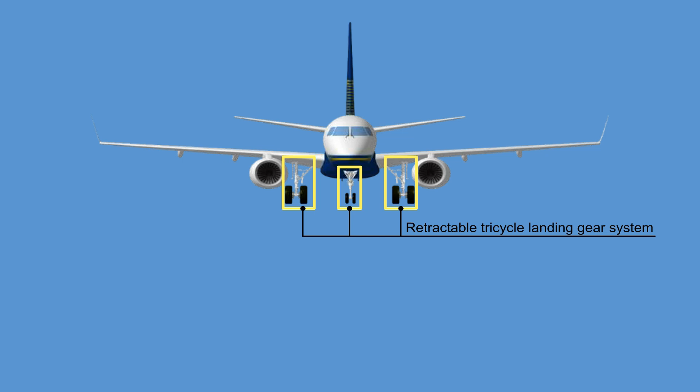The Embraer 190 has a retractable tricycle landing gear system with 2 main landing gear assemblies and 1 nose landing gear assembly. The main landing gear assemblies are telescopic and retract sideways into the wing and fuselage. Each main landing gear assembly incorporates 2 wheels with multi-disc carbon brake assemblies.

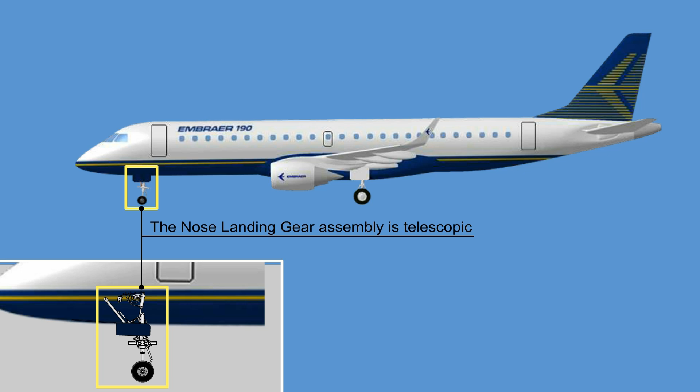The nose landing gear assembly is telescopic and retracts forward into the fuselage. The nose landing gear assembly incorporates 2 wheels with a hydraulic nose wheel steering mechanism, allowing the aircraft to turn on a taxiway as narrow as 17 meters.

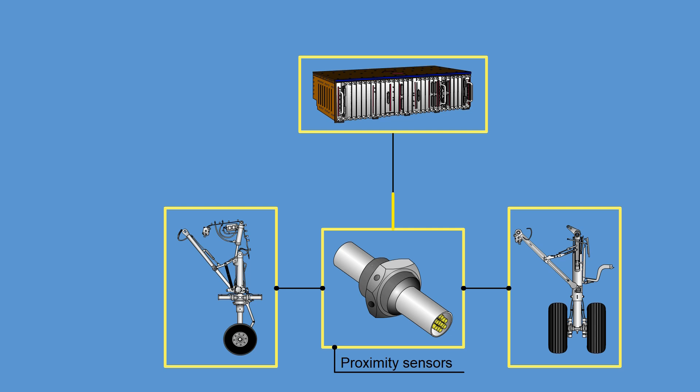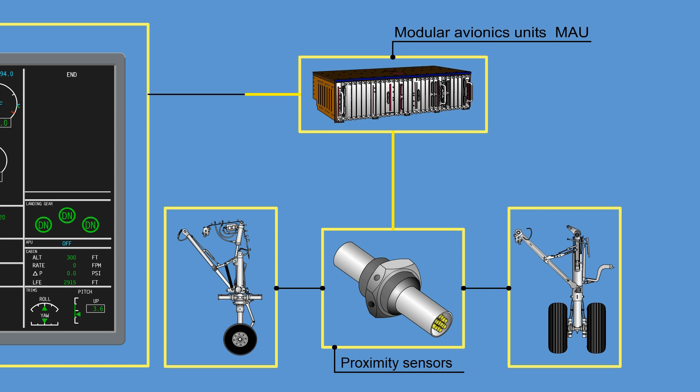During normal operation, the landing gear system is electronically controlled and hydraulically operated. Several proximity sensors are installed to provide position and status signals to different electronic modules, located in the Modular Avionics Units, or MAU, for control and monitoring purposes. The sensors also display system status to the pilots via the EICAS display in the cockpit.

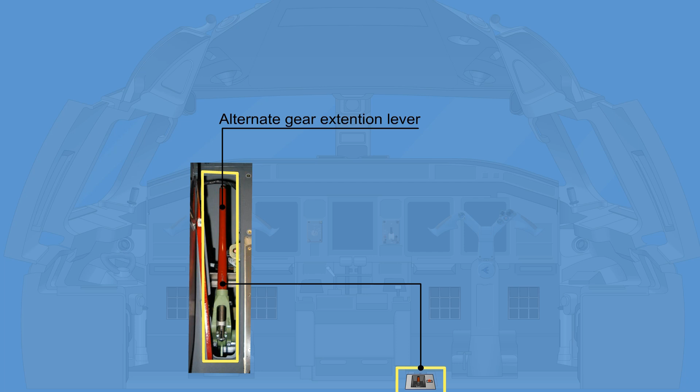The following equipment is installed in the cockpit for landing gear extension and retraction. The landing gear lever, for extension and retraction of the landing gear during normal operation. An electrical override switch is used to extend the landing gear in case of a failure in the landing gear electronics. And an alternate gear extension lever used for free-fall extension of the landing gear in case of both electronic and hydraulic system fail.

The cockpit equipment for steering the aircraft includes a steering hand wheel, the pilot's and co-pilot's rudder pedals, and disarming switches on the control yokes.

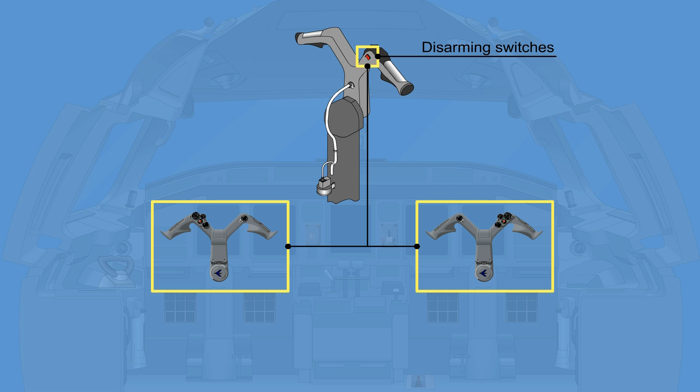2 brake pedals for the left and right main landing gear brakes are installed for both pilots. An emergency parking brake handle mounted on the center pedestal allows for braking even in case of a total hydraulic system loss. An optional automatic braking system can be engaged by the crew by selecting the respective auto brake switch in the cockpit.

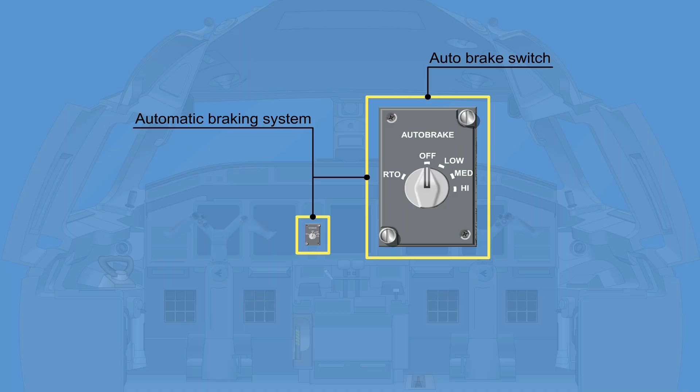The position and warning system incorporates 2 identical proximity sensor electronics modules, or PSEM. Various system proximity sensors, such as weight on wheel or landing gear up and downlock sensors, are connected to the PSEM. The PSEM controls the extension and retraction of the landing gear and indicates position of the landing gear system, the ground spoiler system, and the aircraft doors.

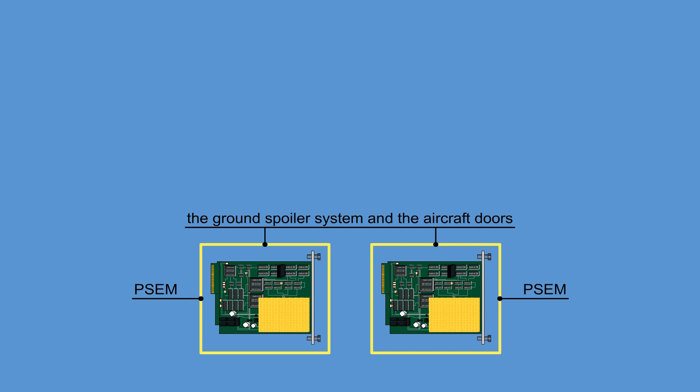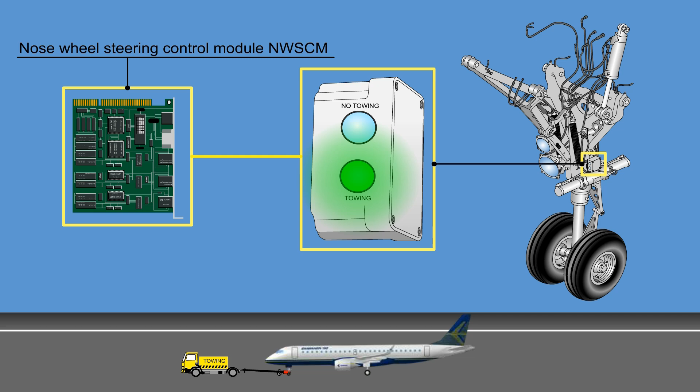The nose wheel steering control module, NWSCM, controls the towing lights. The towing lights provide a visual indication of whether towing is allowed. The PSEM also controls the air-ground system.

Proximity sensors on the nose and main landing gear, referred to as weight-on-wheel sensors, sense whether the aircraft is on ground or in flight. Weight-on-wheel sensor status is distributed to various aircraft systems via the ASCB.

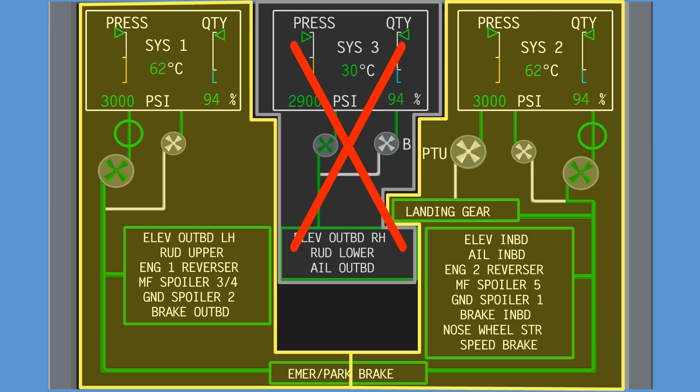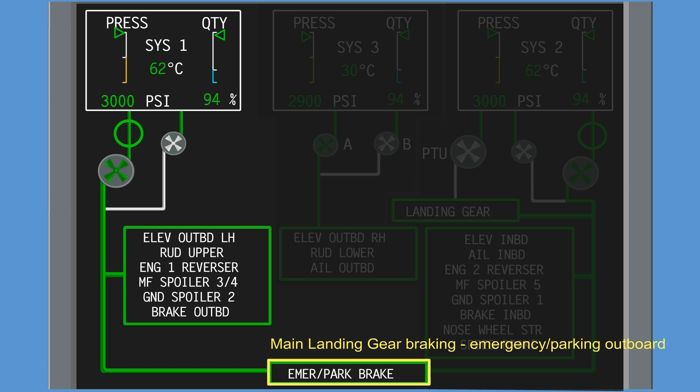The landing gear system of the aircraft uses Hydraulic System 1 and 2 to perform the various functions. Hydraulic System 3 is not used. Hydraulic System 1 provides hydraulic pressure for the following systems: main landing gear braking, outboard wheels; main landing gear braking, emergency parking outboard. Hydraulic System 2 connects to the following systems: main landing gear and nose landing gear extension and retraction; main landing gear braking, inboard wheels; main landing gear braking, emergency parking inboard; and the nose landing gear steering.

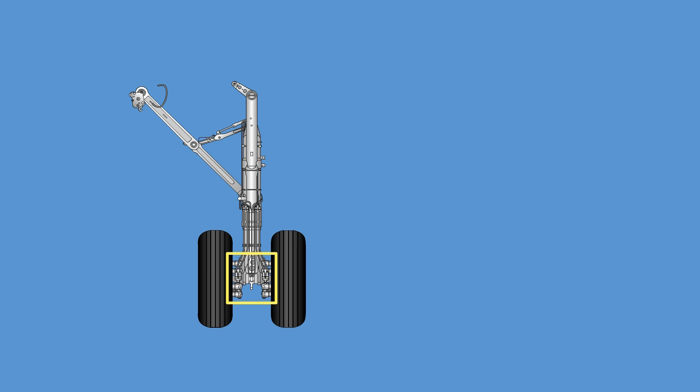The main landing gear assemblies are attached to the left and right wings. The assemblies include 2 wheels with brakes attached to a telescopic shock strut. A folding side stay holds the main landing gear in the fully extended position. A locking stay holds the side stay in the fully extended position.

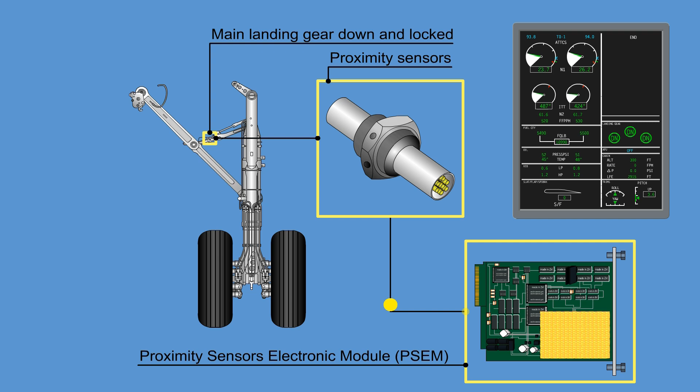Proximity sensors transmit the following signals to the Proximity Sensors Electronic Module, PSEM: main landing gear down and locked, main landing gear up and locked, and aircraft on ground, also referred to as WOW, weight on wheels.

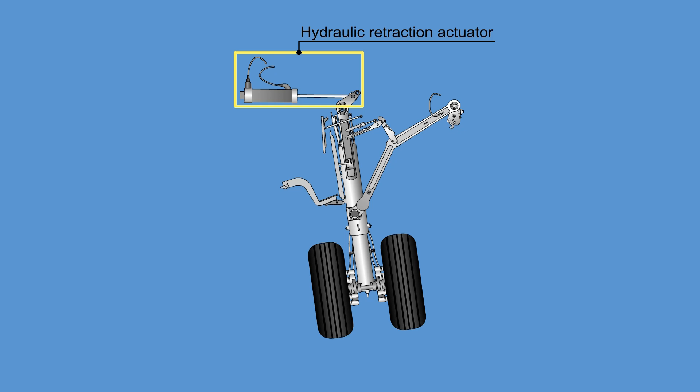During retraction, a hydraulic release actuator unlocks the locking stay. A hydraulic retraction actuator retracts the main landing gear. The up lock holds the main landing gear in the retracted position. There are 2 doors attached to the outboard side of each main landing gear. A third door is attached to the wing. The doors are mechanically opened during extension and closed during retraction.

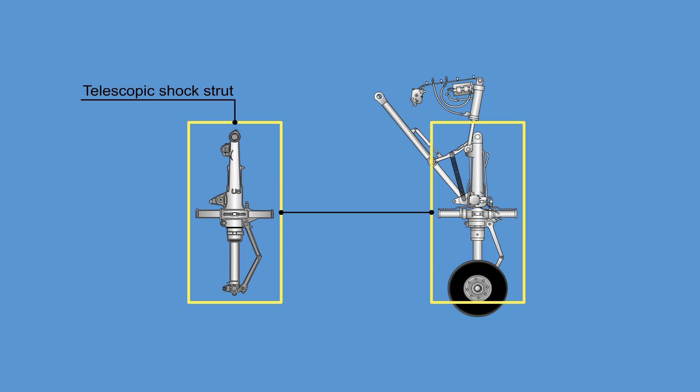The nose landing gear assembly is attached to the forward fuselage. 2 wheels and a hydraulic steering motor are attached to a telescopic shock strut. A folding drag brace holds the nose landing gear in the fully extended position. A locking stay holds the drag brace in the fully extended position. A pair of downlock springs hold the locking stay in the extended and locked position.

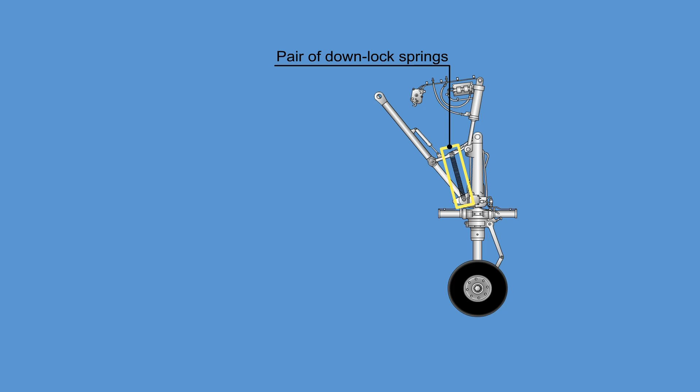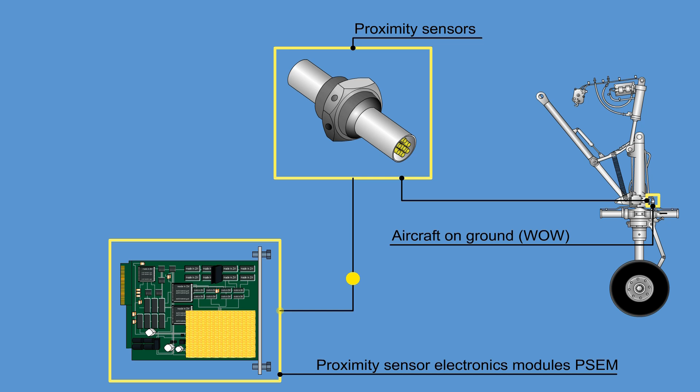Proximity sensors and feedback sensors transmit the following signals to the proximity sensor electronics modules and the nose wheel steering control module: nose landing gear down and locked, nose landing gear up and locked, aircraft on ground, and nose landing gear steering angle and nose landing gear steering over travel.

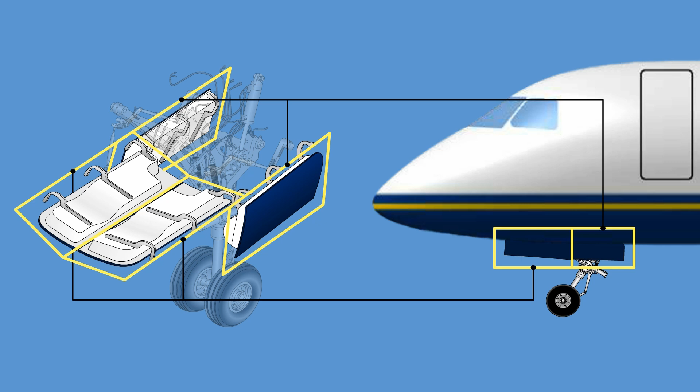During retraction, a hydraulic release actuator unlocks the locking stay. A hydraulic retraction actuator retracts the nose landing gear. The up lock holds the nose landing gear in the retracted position. 2 mechanically operated doors are mounted in the fuselage on each side. The forward doors close again as the nose landing gear reaches the extended position.

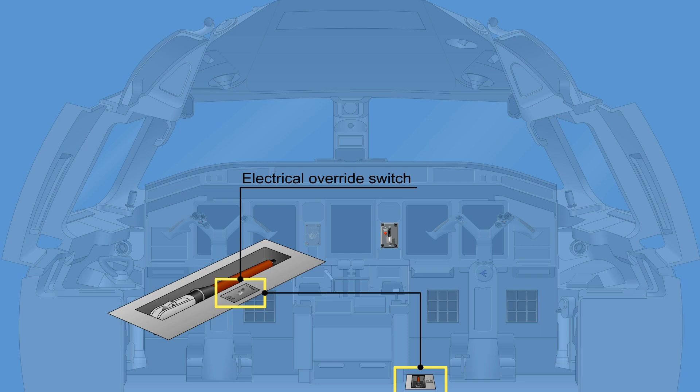There are 3 modes of landing gear operation available to the crew: normal extension and retraction, electrical override switch, and alternate gear extension lever. In the normal extension and retraction mode, the landing gear actuation is electronically controlled and hydraulically operated.

The landing gear selector valve is controlled by the Proximity Sensors Electronic Module, PSEM. The landing gear selector valve provides hydraulic pressure to the actuation cylinders.

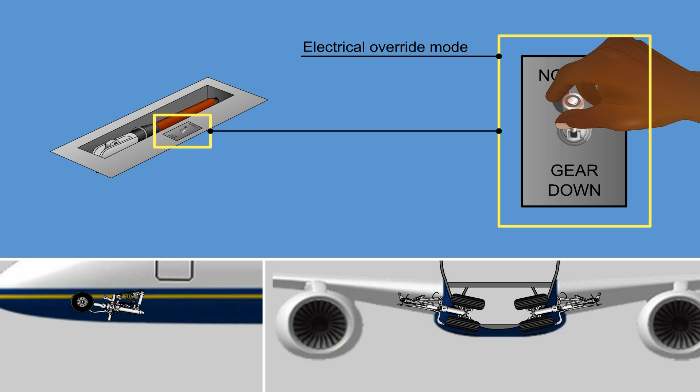In the electrical override mode, the landing gear extension is electrically controlled and hydraulically operated. The extension override switch takes direct control of the selector valve. The Proximity Sensors Electronic Module is removed from the control loop.

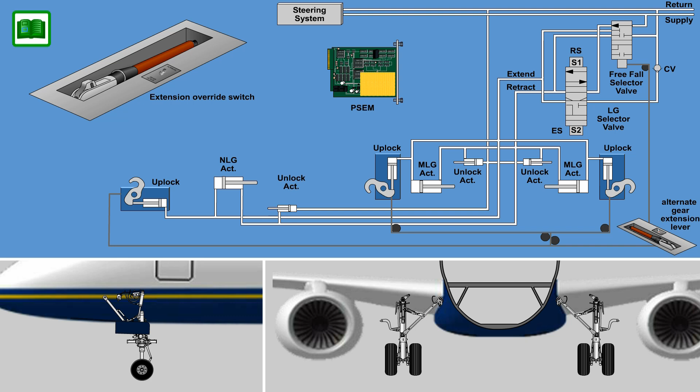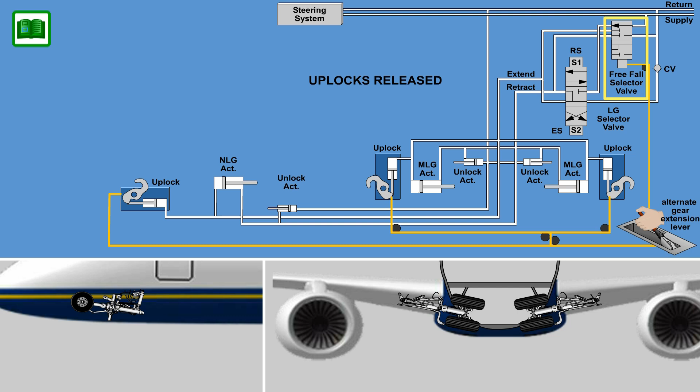In the mechanical freefall or emergency extension mode, the landing gear extension is mechanically controlled and gravity-powered. Pulling the cockpit manual release lever mechanically releases all landing gear uplocks and activates the freefall selector valve. Gravity and aerodynamic forces will then extend the landing gear.

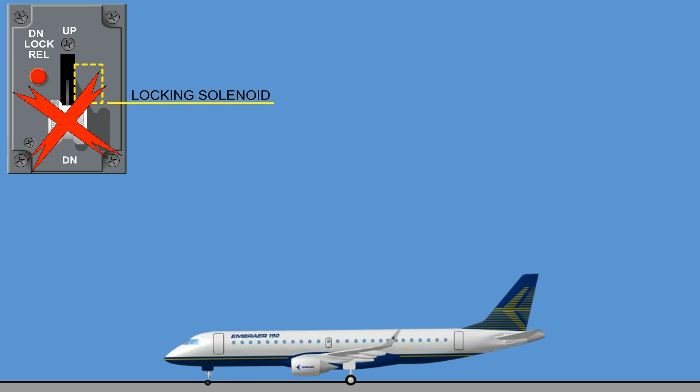During normal operation, the crew uses the landing gear control lever in the cockpit to select the landing gear up and down. The control lever system consists of a lever to command extension and retraction, a down release button, and an illumination panel. A locking solenoid prevents the pilot from selecting the control lever up position while the aircraft is on ground. The lever can be mechanically released using the down release button.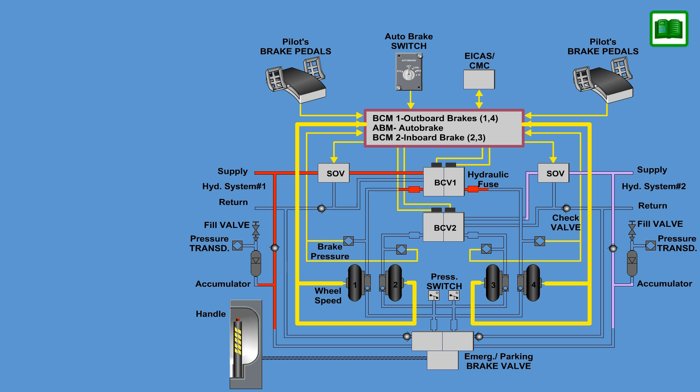2 brake control modules, or BCM, and 1 optional auto brake control module, ABM, control the hydraulic pressure to the inboard and outboard brakes. With the auto brake switch in the cockpit selected on, the ABM will apply the brakes automatically after landing and following a rejected takeoff.

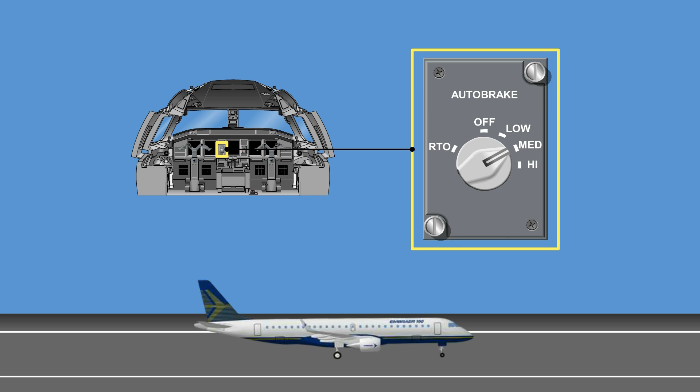The anti-skid control system prevents wheel skid when the brakes are applied. The emergency parking brake system allows brake operation even with a loss of hydraulic pressure.

The brake control system consists of the following main components: 2 cockpit brake pedal assemblies, 1 optional auto brake switch, located in the cockpit, with 5 auto brake selections for various auto brake modes, 2 identical brake control modules, BCM1 controlling the outboard brakes and BCM2 controlling the inboard brakes, and 1 optional auto brake module, ABM, all located in the MAU. 2 brake shutoff valves supplying or isolating hydraulic pressure to the brakes depending on various conditions.

2 brake control valves, one for the inboard and outboard brakes to regulate the hydraulic pressure. 4 pressure transducers provide hydraulic pressure signals to the brake control module. 1 hubcap drive per wheel, incorporating the wheel speed transducer, which transmits wheel speed signals to the brake control module.

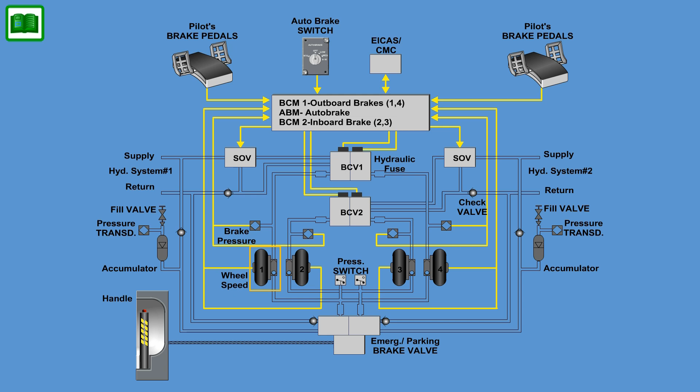The left and right pilot and co-pilot pedals control the left and right brakes independently during normal operation, allowing the pilots to steer the aircraft using differential braking.

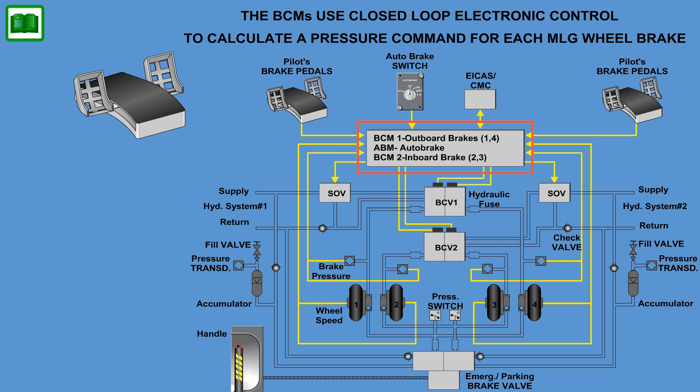The brake pedal LVDTs transmit brake pedal position to the BCMs. The BCMs use closed-loop electronic control to calculate a pressure command for each main landing gear wheel brake, relative to the pedal position. The brake control modules add several high-level functions to optimize braking performance during various conditions.

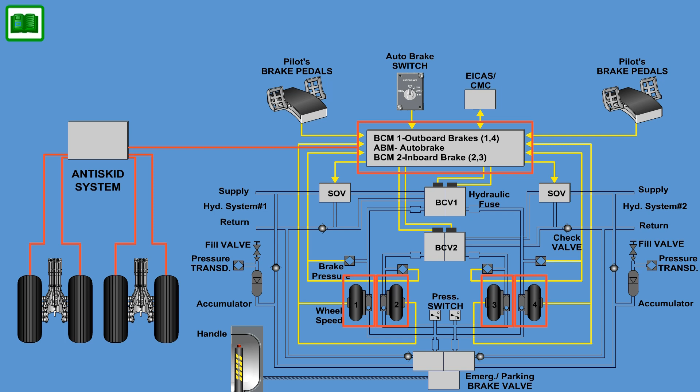Anti-skid control reduces the pressure command to any wheel by comparing wheel speed signals from each wheel in order to prevent wheel skid on slippery runways. Anti-skid protection is active when wheel speed is above 10 knots.

Touchdown protection inhibits a pressure command for any wheel if the aircraft is in flight, or when the aircraft is on ground for less than 3 seconds. However, a spin-up override function allows braking when wheel speed is above 50 knots, even when touchdown protection is still active.

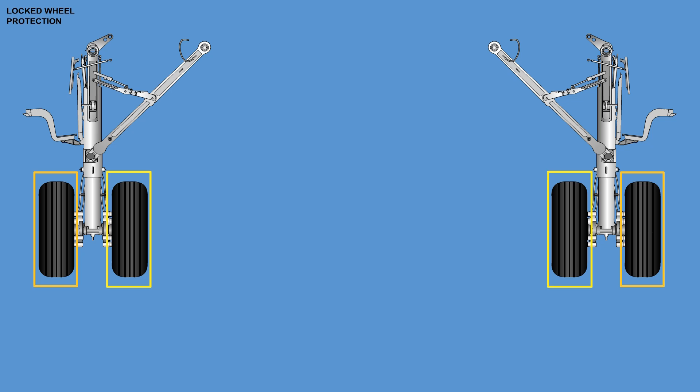The brake control module may also reduce the pressure command for a wheel if the wheel speed of a pair of wheels, either an inboard or outboard pair, is above 30 knots and one wheel in the pair turns at less than 33% of its partner's speed, called locked wheel protection.

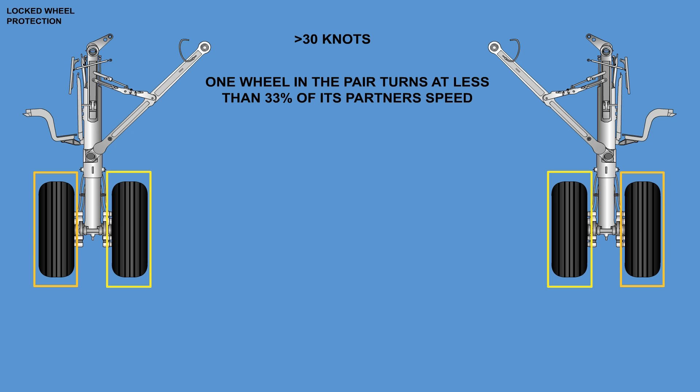After takeoff, the brake control module applies a pressure command to all wheels for 4 seconds, when weight on wheel signal indicates the aircraft is in flight.

The landing gear selector is moved from down to up, and the proximity sensors indicate that the landing gear is not down and locked. The brake control modules also control the 2 brake shutoff valves in order to isolate the brake control valves from hydraulic pressure.

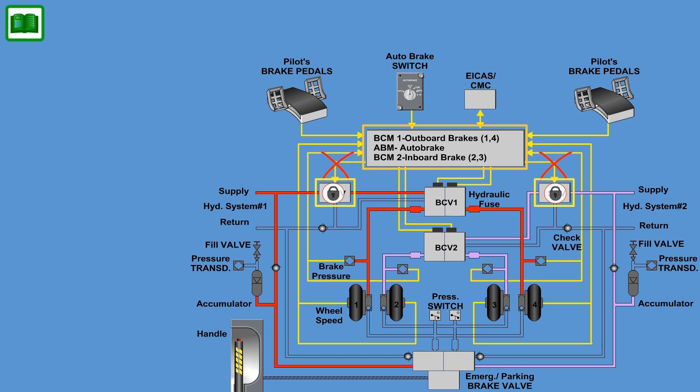In flight, the BCMs de-energize the brake shutoff valves, isolating hydraulic supply to the brake control valve 10 seconds after the aircraft has left the ground, when the landing gear selector is in the up position and wheel speed is 0. The brake system is depressurized during flight.

Before landing, when the landing gear selector is moved to the down position, the shutoff valves are energized again in order to perform a brake control valve test sequence, including a change in the brake pressure command by 600 psi, which must be confirmed by the pressure transducers.

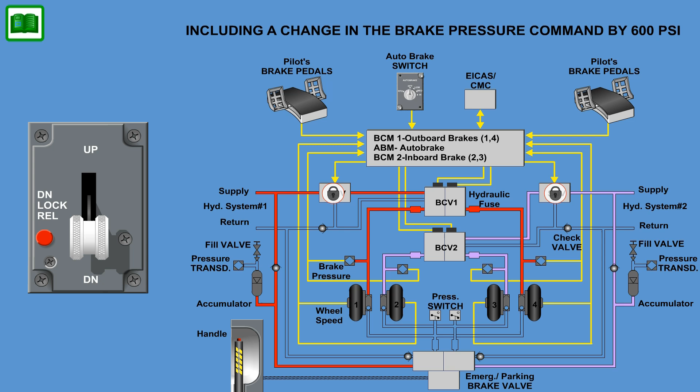Following a successful test sequence, the shutoff valves are de-energized again before touchdown and remain de-energized as long as touchdown protection is active. The auto brake module provides pressure commands to the brake control modules if the auto brake control is active. Auto brake control can be selected on or off by the crew by means of the auto brake selector switch in the cockpit.

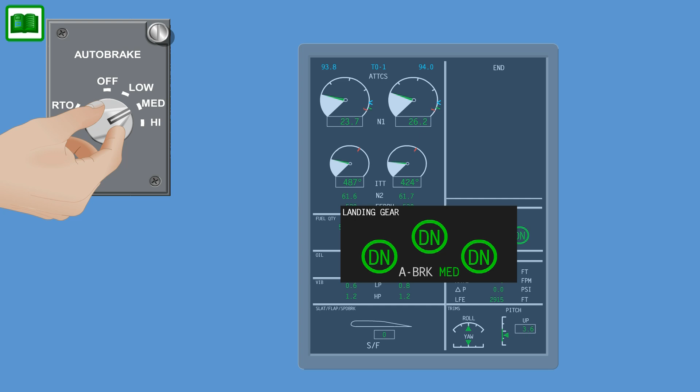The following auto brake modes can be selected: RTO for automatic braking following a rejected takeoff, or low, medium, or high for 3 different levels of deceleration after landing. During landing auto brake application, the deceleration rate is calculated by the ABM using changes in ground speed. The crew can reselect the deceleration to any of the 3 levels without disarming the auto brake.

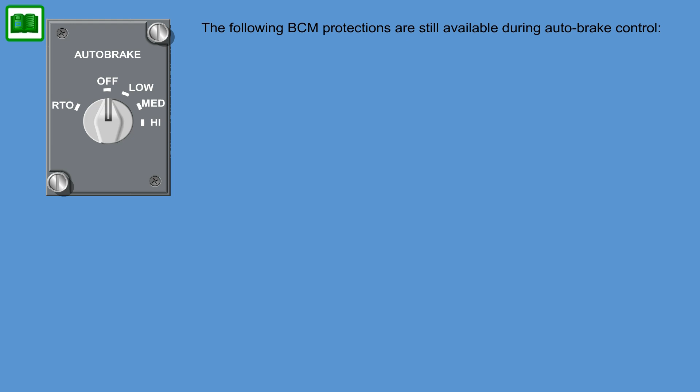If the brake control system detects a fault, the auto brake selector switch springs back to the off position. The following BCM protections are still available during auto brake control: anti-skid control, touchdown protection, and locked wheel protection.

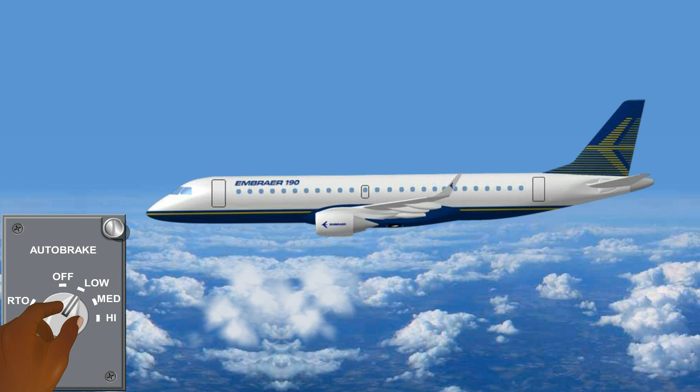Landing auto brake control can be armed by the crew under the following conditions: the auto brake selector switch is set to low, medium, or high; left and right weight on wheels indicates that the aircraft is in flight; the average wheel speed is below 60 knots; brake pedals are not pressed in; and no brake control system failures are detected.

Landing auto brake control will be applied after touchdown when the following conditions apply: landing auto brake is armed and the average wheel speed is above 60 knots; either weight on wheels indicates aircraft on ground for more than 2 seconds; and both thrust levers are in idle position.

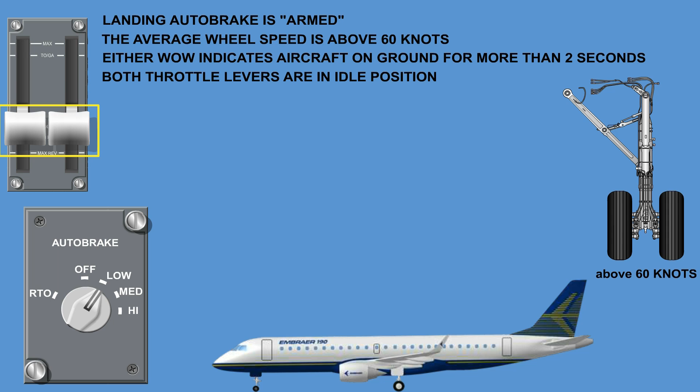Landing auto brake will be disarmed if the selector switch is set to off, the brake pedals are pressed in, any failure in the brake control system is detected, or either thrust lever advances beyond idle.

Rejected takeoff auto brake can be armed by the crew under the following conditions: the auto brake selector switch is set to RTO; the left and right weight on wheels indicates that the aircraft is on ground; the average wheel speed is below 60 knots; and no brake control system failures are detected.

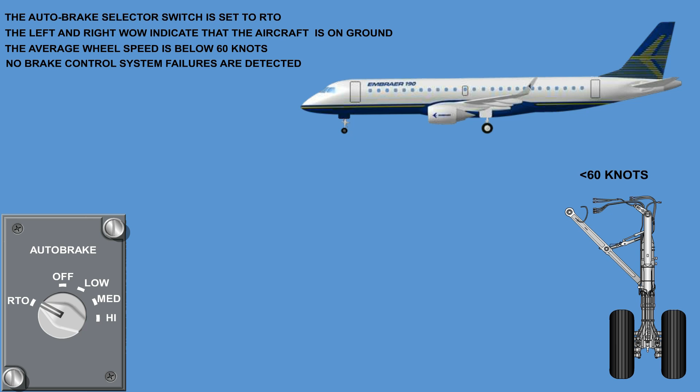RTO auto brake control will be applied during a rejected takeoff if RTO auto brake is armed and the average wheel speed is above 60 knots, and both thrust levers are in idle position.

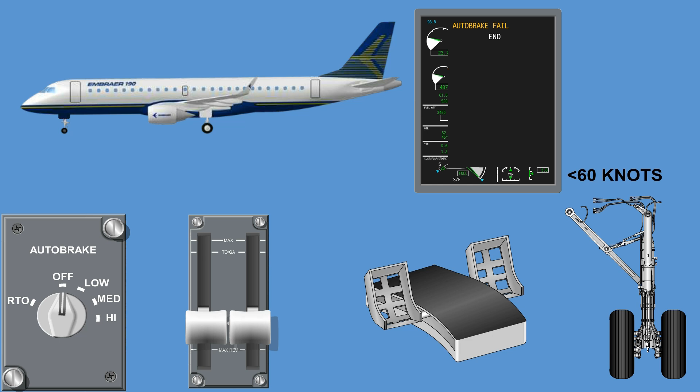RTO auto brake will be disarmed if the selector switch is set to off, any braking is applied while wheel speed is above 60 knots, any brake control system failure is detected while wheel speed is below 60 knots, or either thrust lever is advanced beyond idle.

The emergency parking brake system is mechanically actuated by means of a handle located on the center pedestal in the cockpit. The handle can be moved 60 degrees between the stowed and full brake position to regulate the emergency brake. The handle locks at 60 degrees to set the parking brake, and the emergency park brake on light in the cockpit will illuminate.

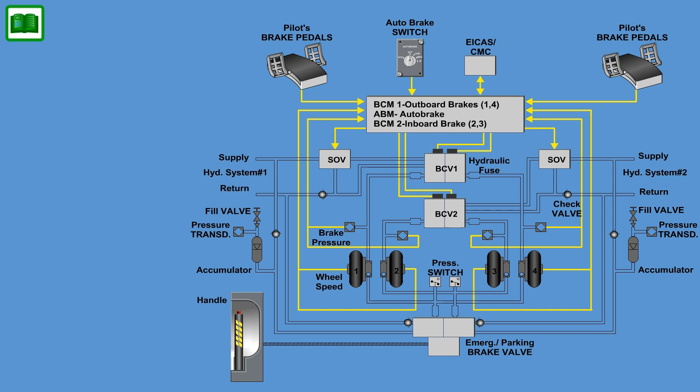One side of the valve is connected to hydraulic system 1 and actuates the outboard brakes. The other side is connected to hydraulic system 2 and actuates the inboard brakes. The system is isolated from the normal hydraulic supplies by check valves. In the event of a total hydraulic failure, emergency braking is still available to both inboard and outboard wheels through the emergency parking brake valve, using hydraulic pressure from the accumulators.

Shuttle valves allow either normal or emergency brake pressure to activate the brakes. The MFD status page has 2 ways of providing temperature indication: numerical and pictorial. There are 2 brake temperature categories on the MFD.

Temperature indication is green up to 251 degrees Celsius, which means that the brakes are able to absorb maximum kinetic energy. Advisory indication is shown in amber between 252 degrees and 840 degrees Celsius, which indicates that cooling is required.

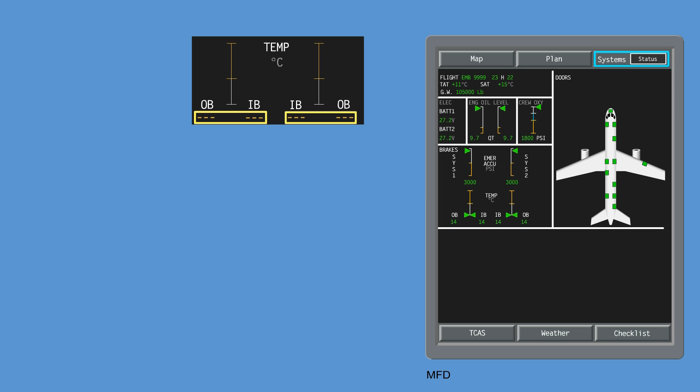If the temperature information has failed or is out of range, the arrow will disappear, and the readout will be replaced by amber dashes. The brake overheat caution message will illuminate on the EICAS when the brake temperature has exceeded the normal operating range. The message will disappear if the temperature drops below a predetermined value.

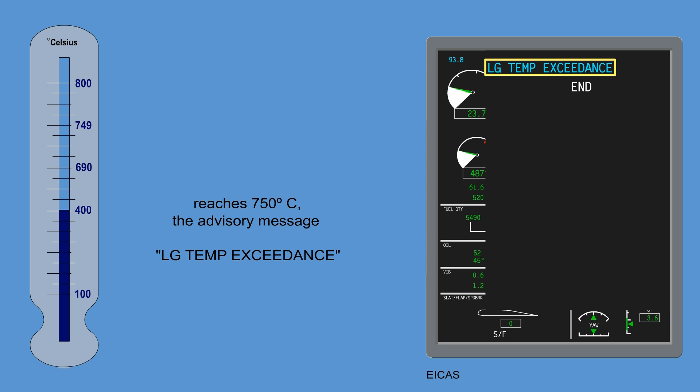If the brake temperature reaches 750 degrees Celsius, the advisory message, Landing gear temperature exceedance, will latch and can only be unlatched by electrically powering down the airplane. Note that the fuse plugs will melt in the main wheel, and inspections, according to the maintenance manual, have to be performed.

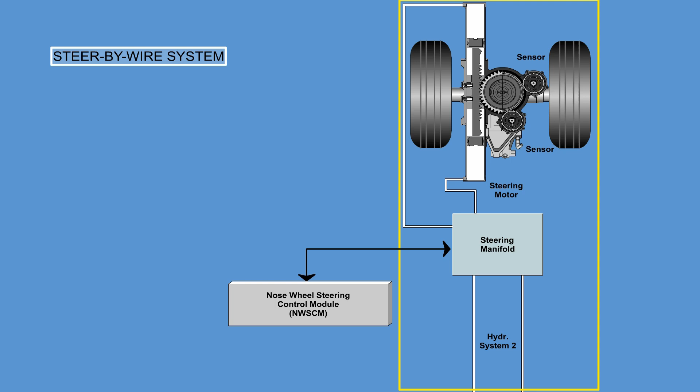The Embraer steering control system is an electronically controlled and hydraulically actuated steer-by-wire system, operating either in the normal mode or in the freewheel steering mode.

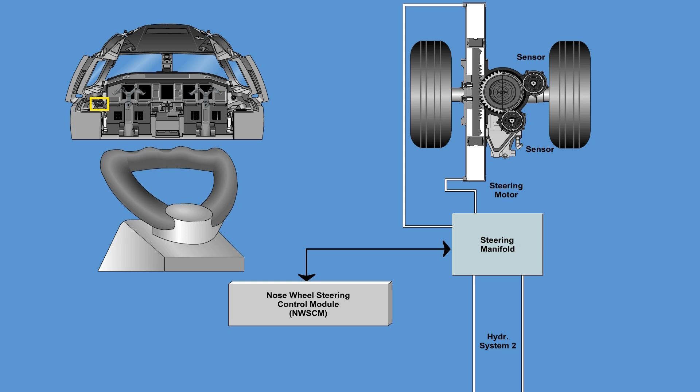The system consists of the following main components: the steering handwheel, located on the left side in the cockpit, used for low-speed steering control; the pilot's and co-pilot's rudder pedals, used for high-speed steering control; and the disarming switches, located on the cockpit control yokes and on the left forward fuselage, used for switching between normal and bypass mode, allowing towing.

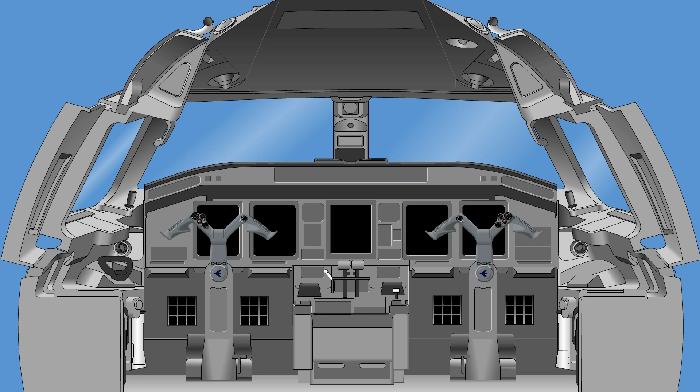The nose wheel steering control module, or NWSCM, electronically controls the steering hydraulic system. The steering control system is powered by hydraulic system 2. The steering handwheel is attached to the left side of the cockpit. It incorporates a switch and a rotary variable differential transducer.

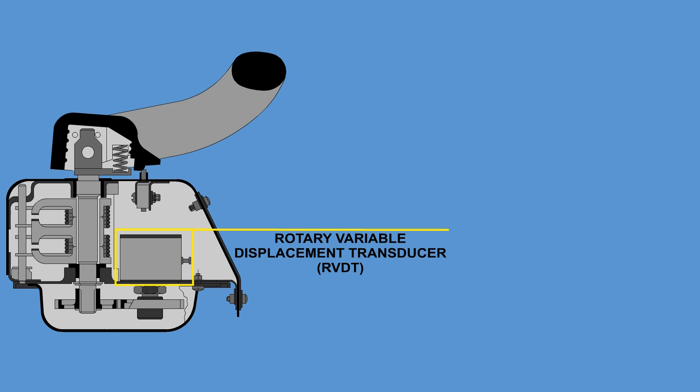To turn the aircraft, keep the handwheel pushed down and rotate it. The RVDTs transmit the position of the handwheel to the NWSCM.

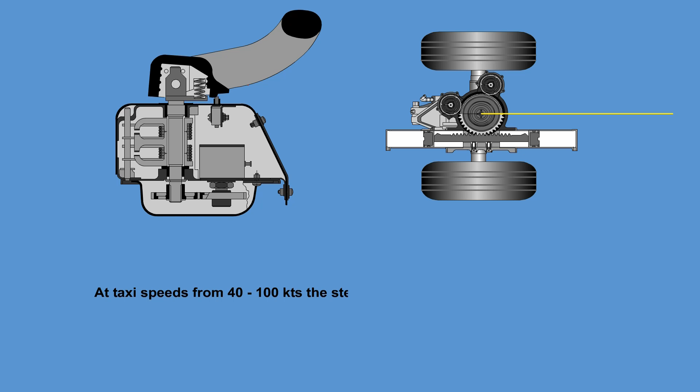The maximum steering angle possible using the handwheel is 76 degrees and is limited further by the NWSCM as aircraft wheel speed increases. At taxi speeds from 40 to 100 knots, the steering angle will be gradually reduced down to 7 degrees.

Steering angle response to handwheel position is non-linear. Turning the handwheel from 0 to 40 degrees results in a steering angle of 10 degrees, and from 40 to 80 degrees results in a steering angle of up to 76 degrees.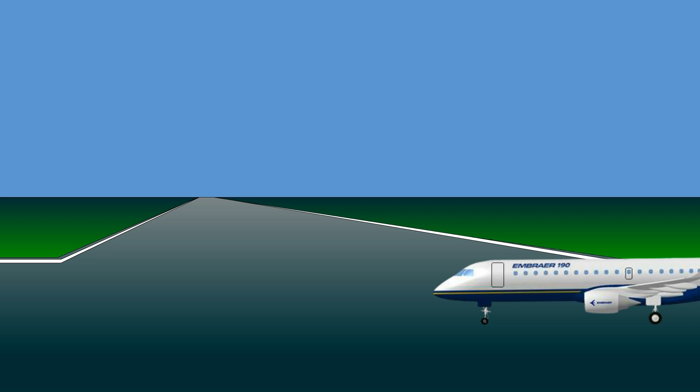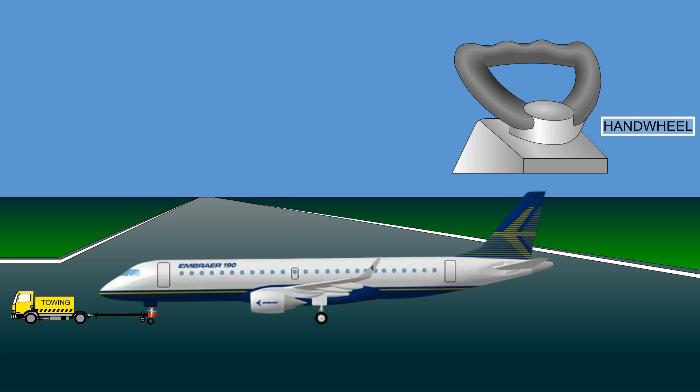The system can be operated either in the active mode, once the handwheel has been pushed down, or in the freewheel steering mode. In the active mode, the flight crew actively steers the aircraft by means of the handwheel rotation, keeping it pressed in down position, or by the rudder pedals if the nose landing gear is on the ground and the NWSCM detects no failure.

In the freewheel steering mode, the nose landing gear steers in response to external forces like towing or differential braking, and is enabled as soon as the steering has been disengaged using the pilot disarm switch or via the outside steering switch to disengage position for ground handling.

Steer off will be displayed on the EICAS. The freewheel steering mode is also automatically engaged anytime the actual steering angle is greater than 76 degrees.

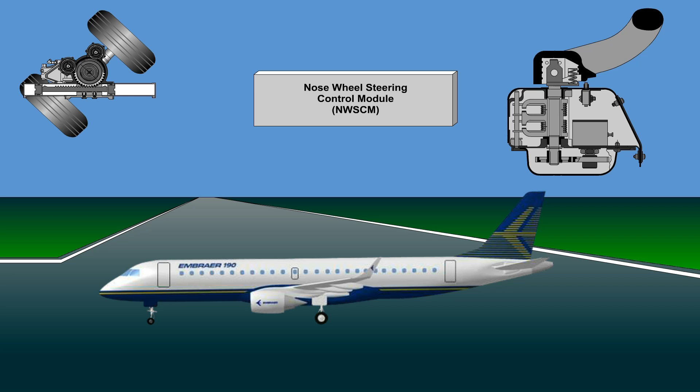If the crew switches from the freewheel steering mode to the normal mode, the steering command from the NWSCM is gradually changed from the actual steering angle to the handwheel or rudder pedal command angle.

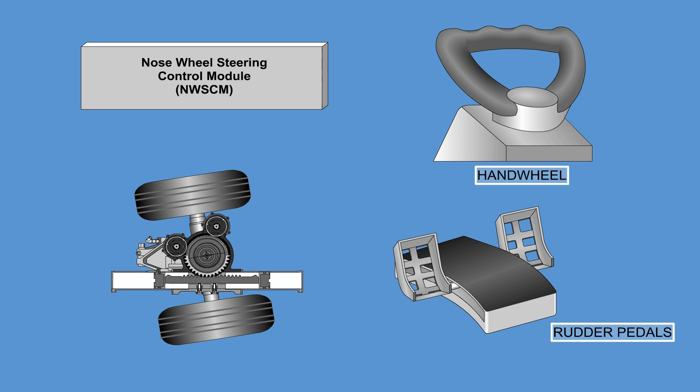Two channels control and monitor the steering system. The nose wheel steering control module compares the difference between rudder pedals or handwheel position and the actual nose landing gear steering angle received from the steering angle feedback sensors. Nose wheel steering control module commands the electro-hydraulic servo valve, EHSV, on the steering manifold to cancel the difference, resulting in a nose landing gear steering movement to the requested position.

After takeoff, nose wheel steering control module switched off, and the nose wheel will be centered by the internal centering mechanism when the shock strut extends.

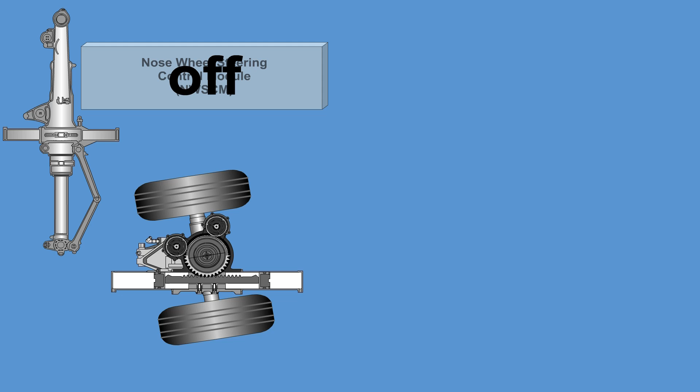The nose wheel steering control module controls the two towing lights installed on the nose landing gear strut. A green light signals the ground crew that towing is permitted, and a red light signals that towing is not permitted.

Towing is not allowed when the steering motor is pressurized, operating in active mode, or if any of the brakes are pressurized. Whenever a safety-critical failure is detected by the nose wheel steering control module, the nose wheel steering is switched to the free caster mode.

On the ICUS, a steer fail caution is displayed when the landing gear is down. After this system disengagement, the nose wheel follows freely in the direction of ground run, and steering can be carried out by use of differential braking and/or by rudder commands.

A steer fault advisory message will be displayed on the EICAS in the case of a degraded function of the steering system after a failure has been detected by the nose wheel steering control module and the aircraft is on the ground.

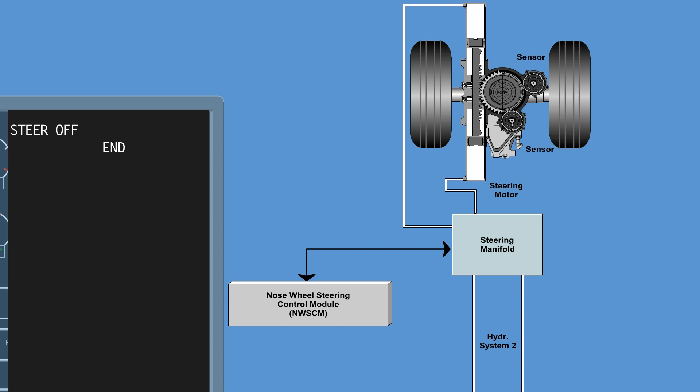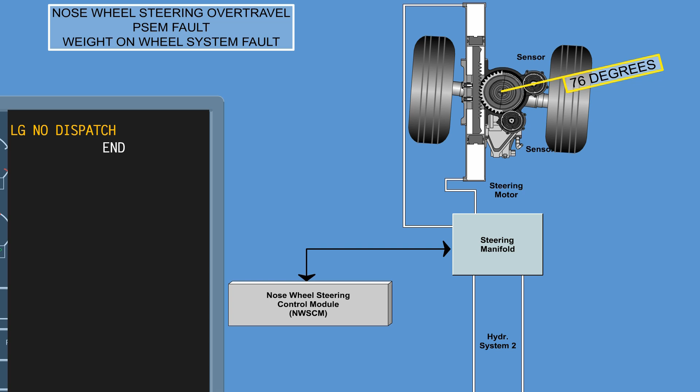The status message, 'Steer off,' will be displayed if the steering system is disconnected, for example with the steering disarming switches. An LG No Dispatch caution appears in case of a nose wheel steering over travel, proximity sensor evaluation module, PSEM, or weight on wheel system fault.

The landing gear position and warning system is used to provide landing gear status and failure information. The system has the following subsystems: the landing gear indicating system, the air ground or weight on wheel system, and the landing gear warning system.

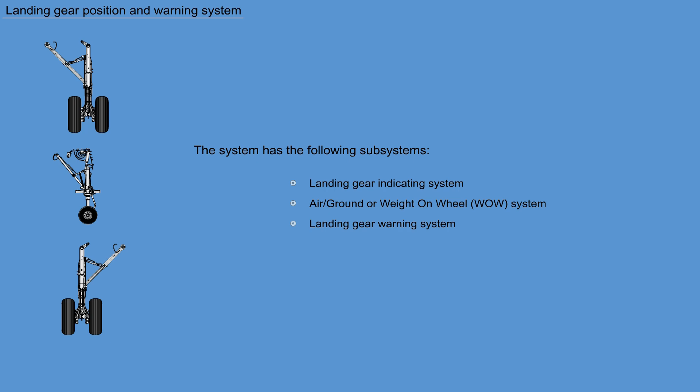The landing gear indicating system is controlled by two identical proximity sensor electronics modules called PSEM, installed in MAU-1 and MAU-3. The PSEMs each make an analysis of the proximity sensors for the landing gear system, ground spoiler system, and aircraft doors.

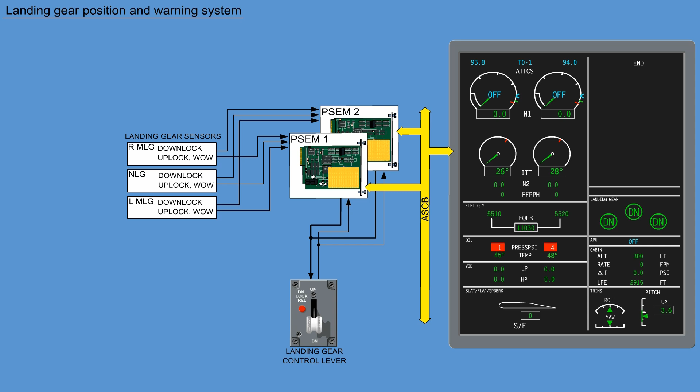The air-ground system makes use of proximity sensors on the main landing gear and nose landing gear to determine whether the aircraft is on the ground or in flight.

The landing gear warning system forwards failure information to the EICAS and warns the pilots of any abnormal landing gear configuration during landing. The EICAS indicates the landing gear position using three colored symbols. From left to right, each box represents the position of the left, nose, and right landing gear.

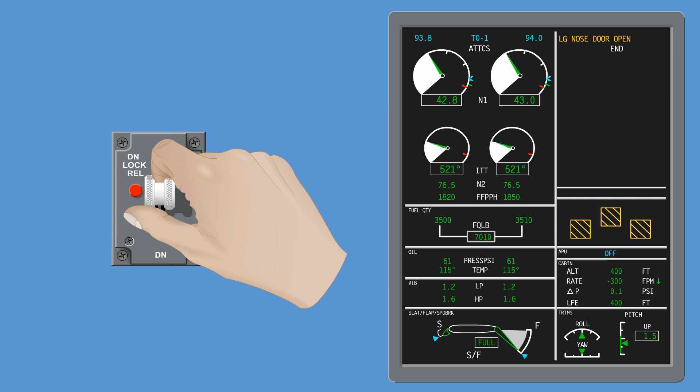With the landing gear down and locked, green circles enclosing a green word, 'down,' are indicated. If the control lever is moved and the gears are in transition, amber crosshatches are shown. If the landing gear is up and locked, white squares enclosing a white word, 'up,' are displayed.

A disagreement between the control lever position and any landing gear leg position for more than 20 seconds will activate the message, 'Landing gear lever disagree,' and the indication of the respective landing gear will turn red. If at least one of the nose landing gear doors fails to close following gear retraction, or one of the two forward doors fails to close after...

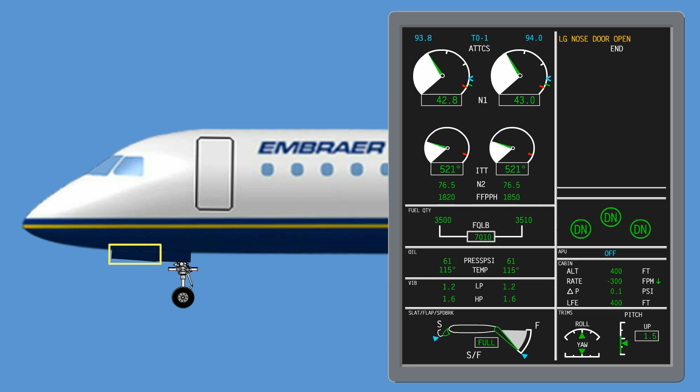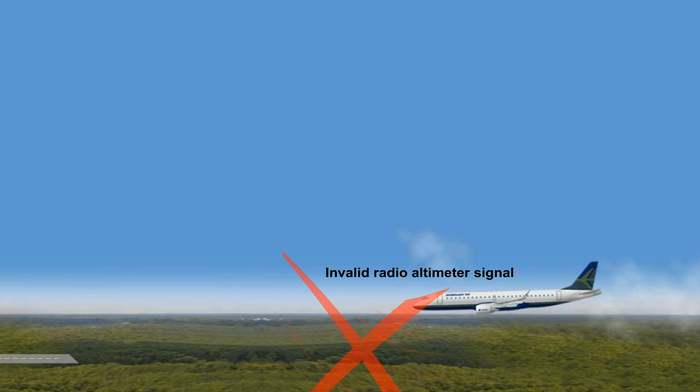If the aural landing gear warning is triggered as a result of an invalid radio altimeter signal, the pilots may cancel the warning by pressing the landing gear warning inhibition switch in the cockpit. When pressed, a white bar within the switch indicates a canceled warning.

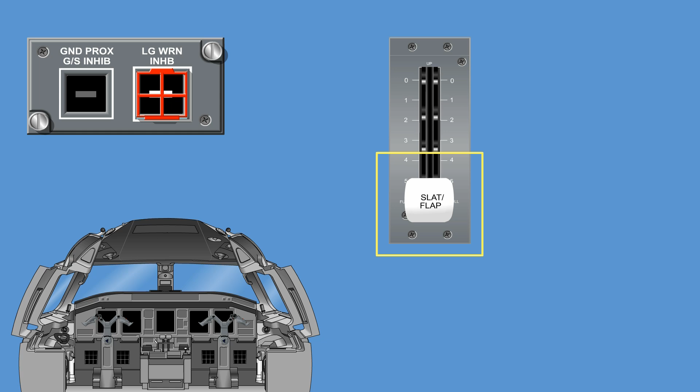Advancing the thrust levers above TLA 38 degrees or TLA 57 degrees respectively, or selecting the flaps to landing configuration, or when all landing gear are down and locked, will extinguish the white indication.